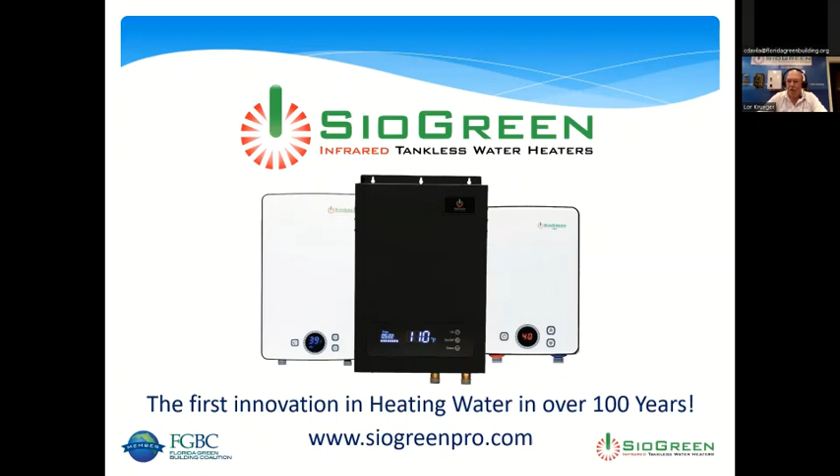You're good. Okay. SioGreen introduces the first innovation in heating water in over 100 years. But before we start, historically, electric tankless water heaters have earned a bad reputation. So try to forget about nearly everything you know about typical electric tankless water heaters.

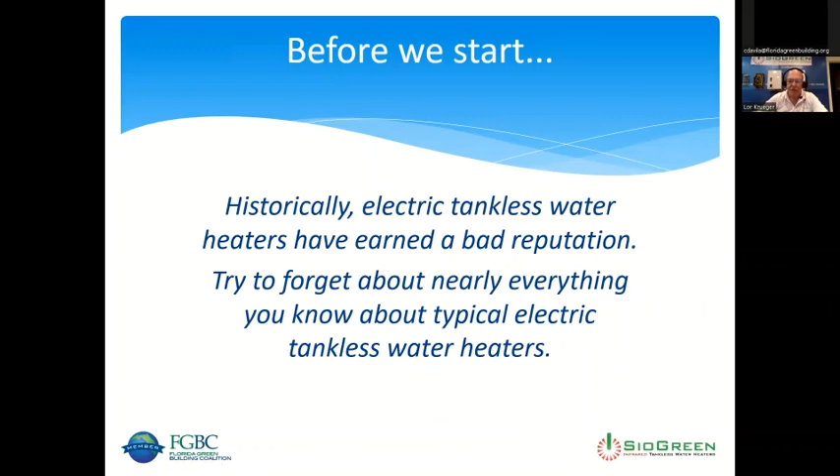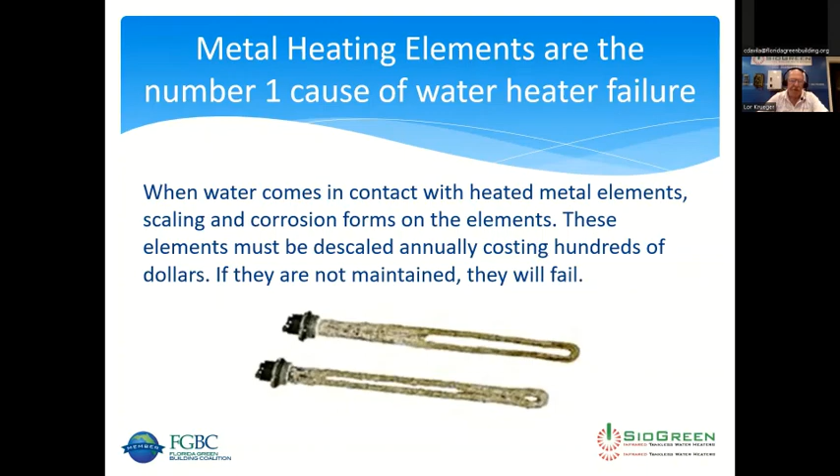Metal heating elements are the number one cause of water heater failure. When water comes in contact with heated metal elements, scaling and corrosion forms on the elements. These elements must be descaled annually, costing hundreds of dollars. If they're not maintained, they will fail.

If you neglect to clean the sediment from the bottom of your tank, bacteria can begin to develop. This bacteria can make you and your family sick when you use the water. Tanks should be flushed annually.

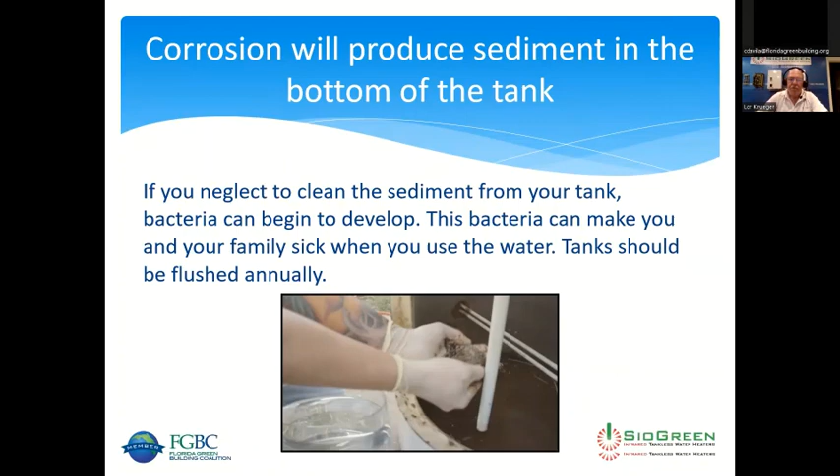So what's inside your water heater? If you don't have your water heater serviced every year, this is what's happening inside. When we asked homeowners when was the last time you had your water heater serviced, most people say never. And this is a very gruesome video of an actual water heater.

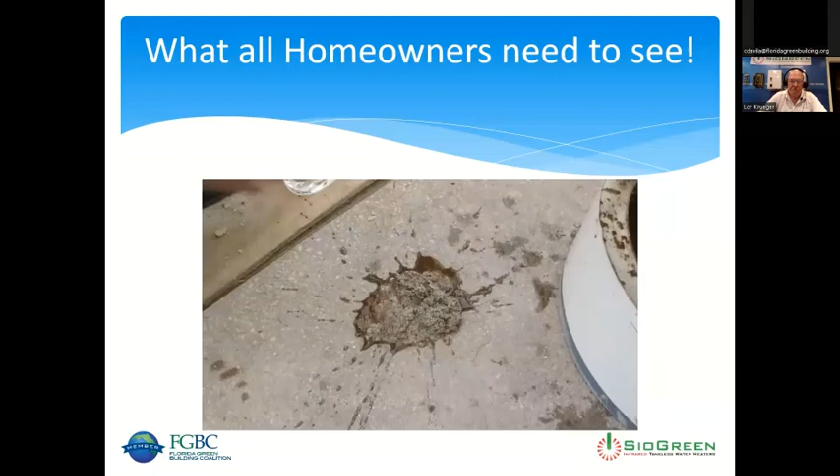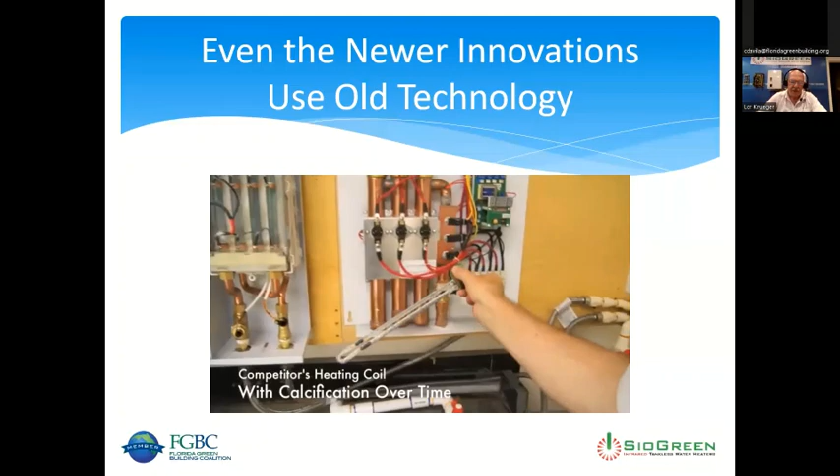So just keep in mind, people aren't even aware that this is happening inside their tank heaters. And if they see this video, that's a real game changer. Even in the new innovations with tankless water heaters, you still have issues with corrosion.

So one thing in common, it's the same old technology. It's been over 100 years and we're still heating water with some form of metal heating elements. And after 100 years, they still corrode.

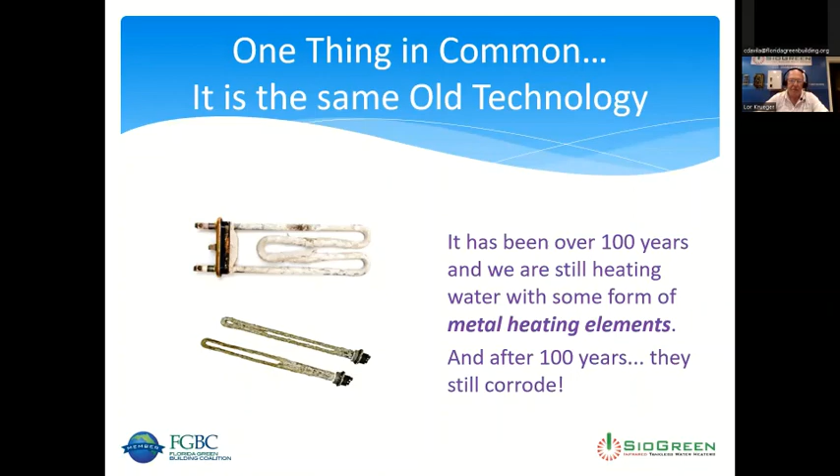There's a hidden cost to the mineral scale. Scaling acts as an insulator, causing the water heater to work harder and harder to heat the water. A scale buildup of only 1/16 of an inch can reduce the energy efficiency of the water heater by up to 50%. The water heater will eventually fail due to excessive heat caused by the insulative properties of scale, and can cut the useful life of the heater in half.

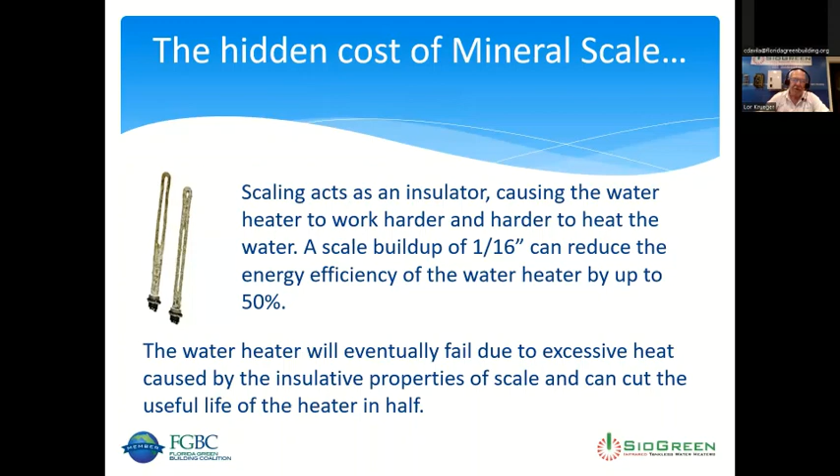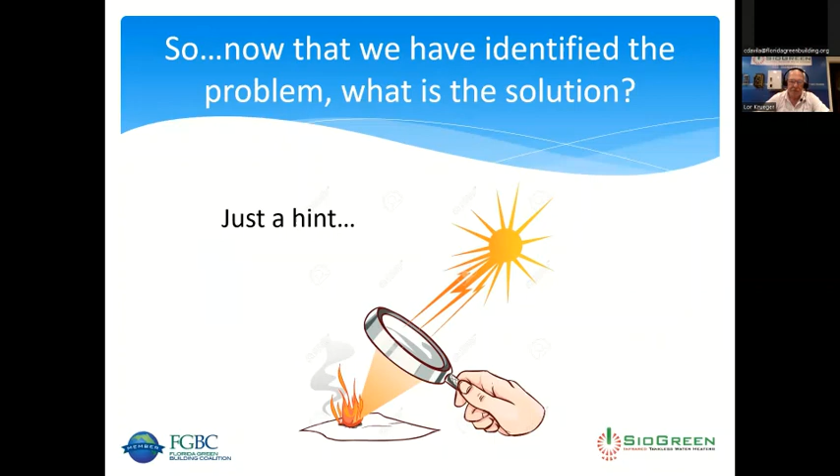So now that we've identified the problem, what's the solution? This is just a hint. We're going to introduce you to the SioGreen Quartz Infrared Electric Tankless Water Heaters.

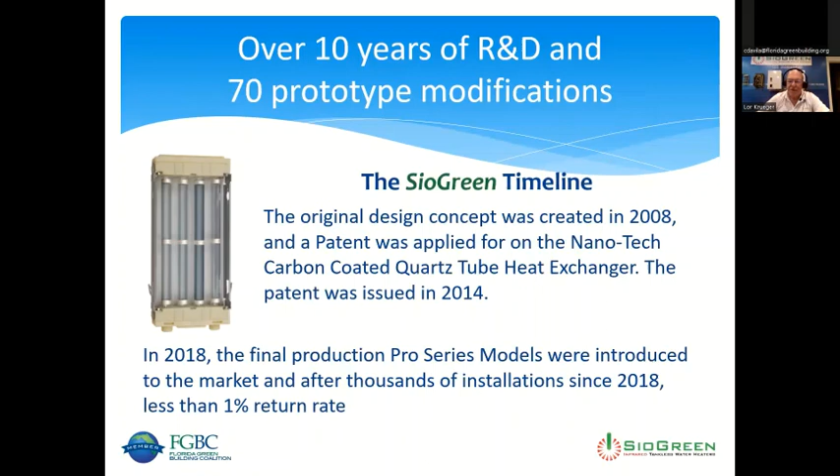A little bit of history. The original design concept was created in 2008, and a patent was applied for on the nanotech carbon-coated quartz tube heat exchanger, and the patent was issued in 2014. In 2018, the final production Pro Series models were introduced to the market, and after thousands of installations since 2018, we have less than 1% return rate.

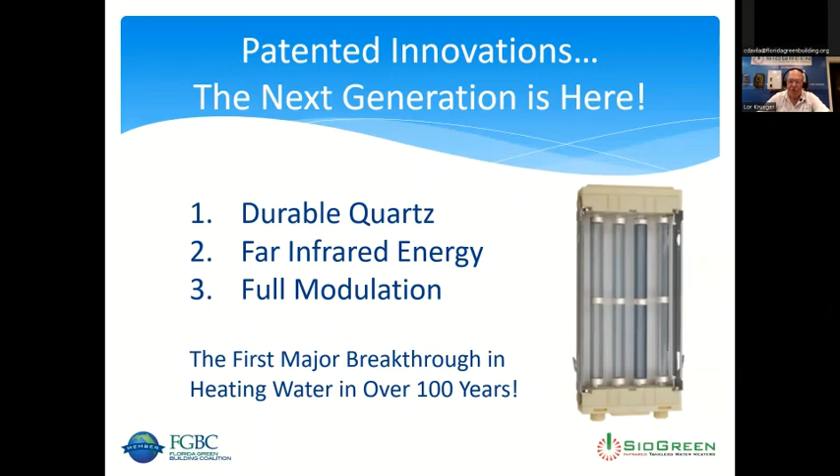These are the three patented innovations. This is what sets us apart from every other water heater on the market. We have durable quartz, far infrared energy, and full modulation. And this truly is the first major breakthrough in heating water in over 100 years.

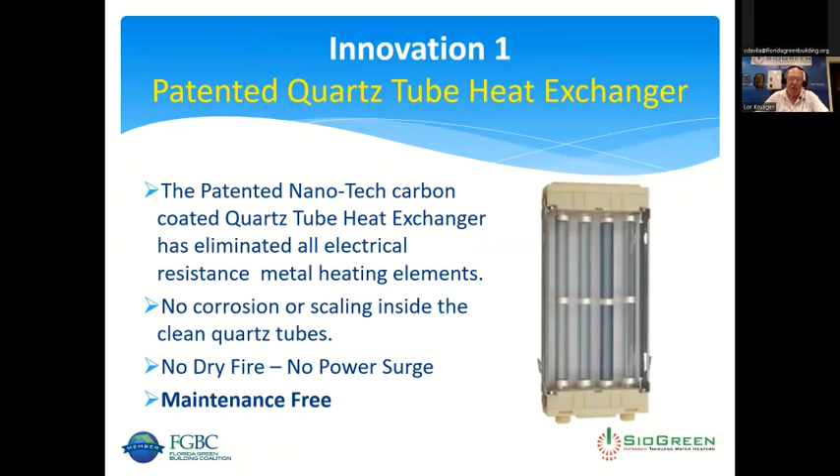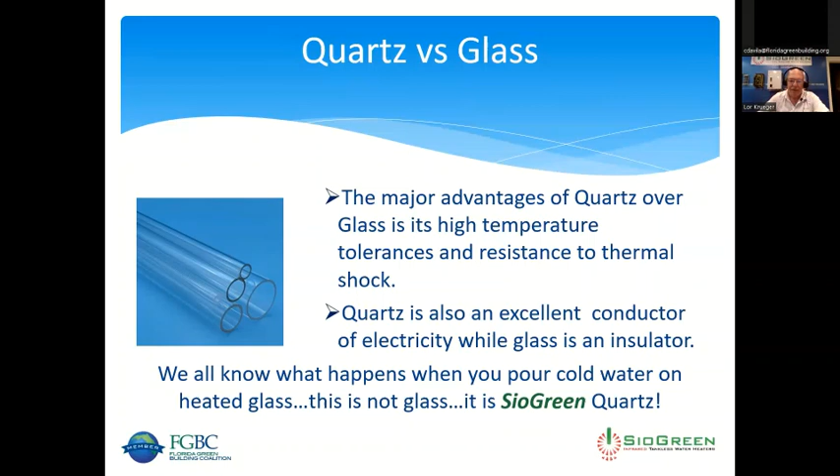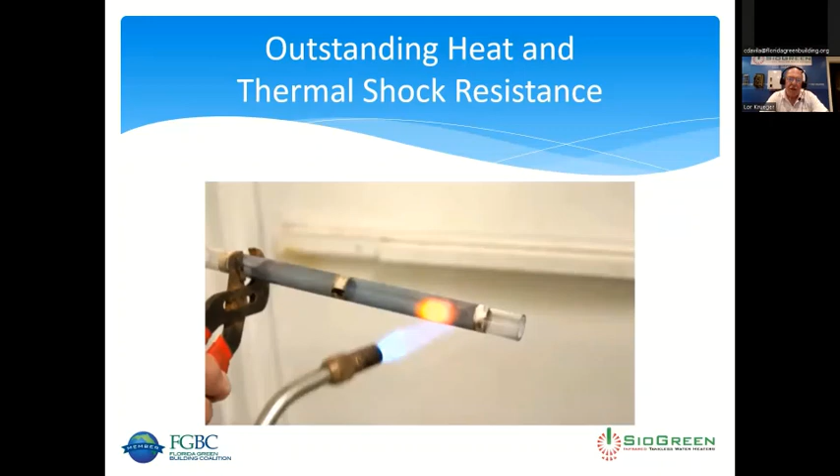About 8 years ago, I was at the SioGreen office before I started working with them, and we wondered what would happen if we put a torch on that tube. Had no idea. That's me holding it with the channel locks. That tube got cherry red hot, about 1300 degrees, and we poured cold water on it with absolutely no thermal shock. That was amazing.

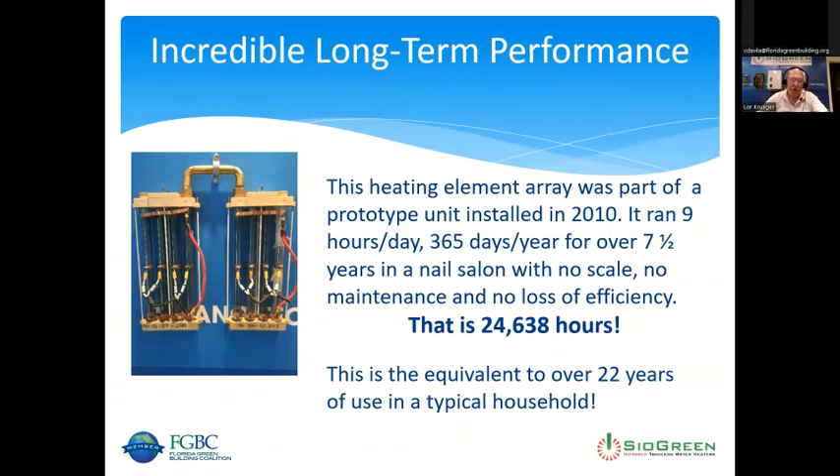Innovation 2, infrared energy, radiant heat. The sun heats the earth with radiant infrared energy. We heat large buildings with radiant infrared energy. And now we heat water with the same radiant infrared energy.

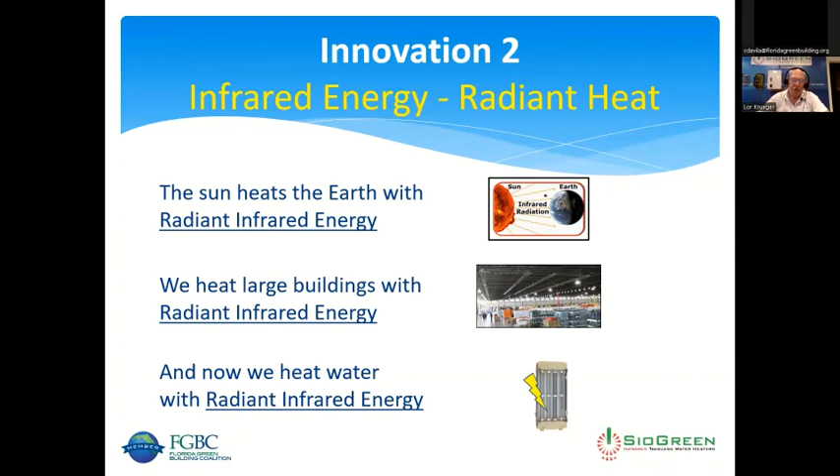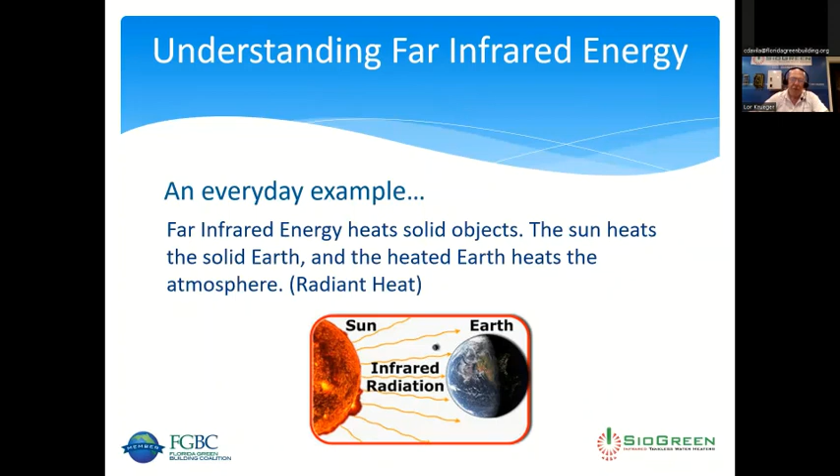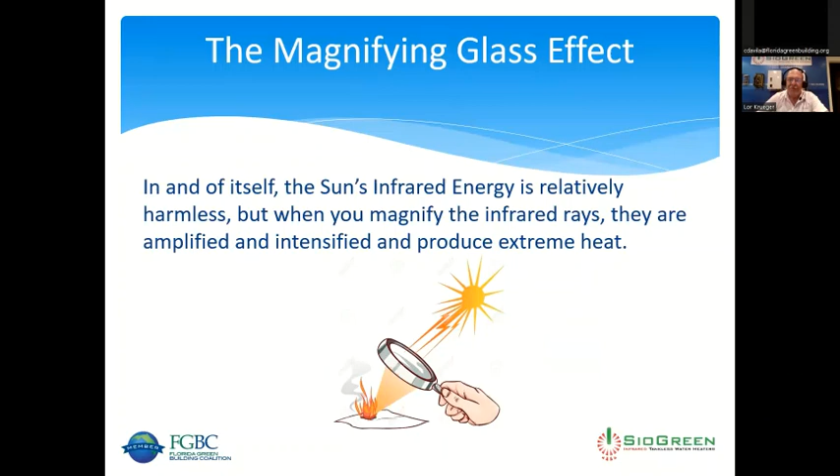Understanding far infrared is a very simple everyday example. When the sun heats the solid earth, the heated earth heats the atmosphere. That's radiant heat. In and of itself, the sun's infrared energy is relatively harmless. But when you magnify the infrared rays, they are amplified and intensified and produce extreme heat. That's as simple as we can make it.

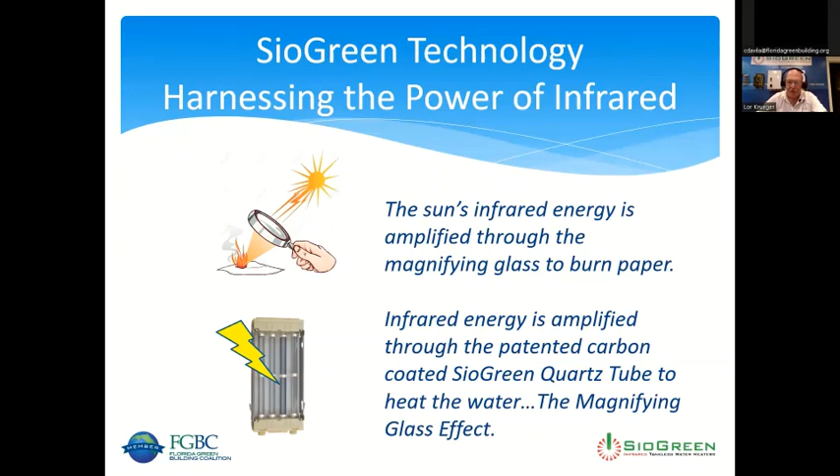The sun's infrared energy is amplified through a magnifying glass to burn paper. Infrared energy is amplified through the patented carbon-coated SioGreen quartz tube to heat the water. It's the magnifying glass effect.

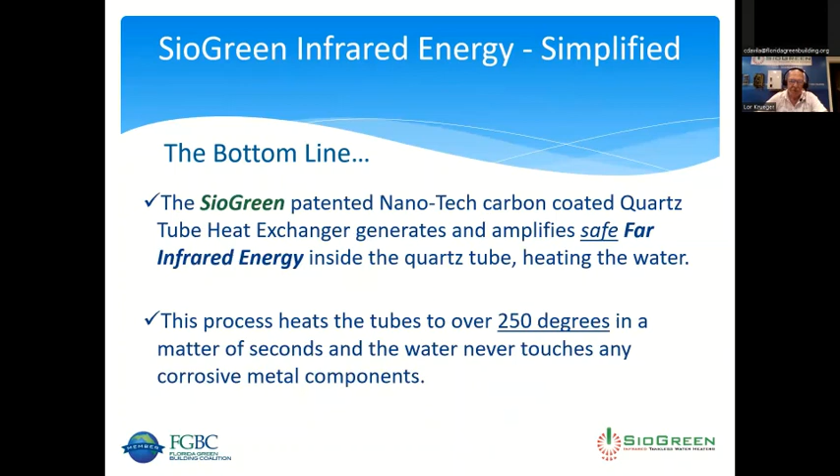So the bottom line: SioGreen's patented nanotech carbon-coated quartz tube heat exchanger generates and amplifies safe, far infrared energy inside the quartz tube, heating the water. This process will heat the tubes to over 250 degrees in a matter of seconds, and the water never touches any corrosive metal components. So why infrared energy?

This is going to get into the weeds a little bit, but SioGreen infrared technology uses amplified infrared radiant heat. But there's another major advantage to infrared: heating water at the molecular level. Water flows in clusters of 5 to 12 molecules. When the far infrared rays are applied to the clusters, the molecular structure of the water is altered due to resonance absorption. The water clusters are excited and broken down into individual molecules.

The infrared energy is then able to heat the molecules on an individual basis, ensuring the water is thoroughly heated at an accelerated rate. The water gets hotter faster and more thoroughly. This allows SioGreen tankless water heaters to operate much more efficiently.

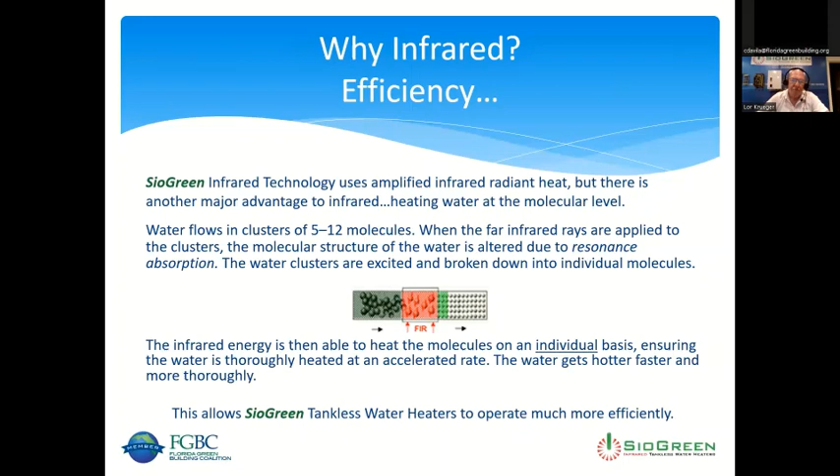Innovation 3, true modulation. There are a lot of competitive products on the market that claim to have modulation. Typically these are 2-tube, 3-tube tankless heaters, and their modulation basically is turning one of those tubes off and turning it back on.

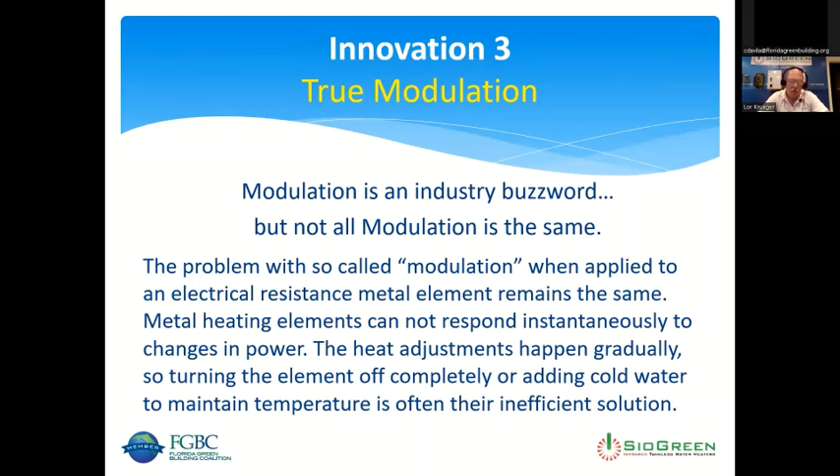The problem with so-called modulation, when applied to an electrical resistance metal element, remains the same. Metal heating elements cannot respond instantaneously to changes in power. The heat adjustments happen gradually, so turning the element off completely or adding cold water to maintain the temperature is often their inefficient solution.

SioGreen uses an intelligent computerized internal controller. Each quartz tube has 2 sections. We monitor each section of each tube and adjust the amount of power required to reach and maintain the exit temperature setting.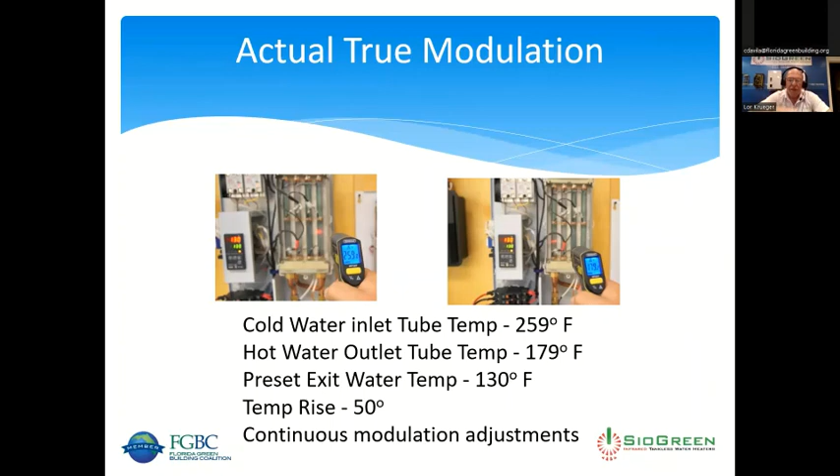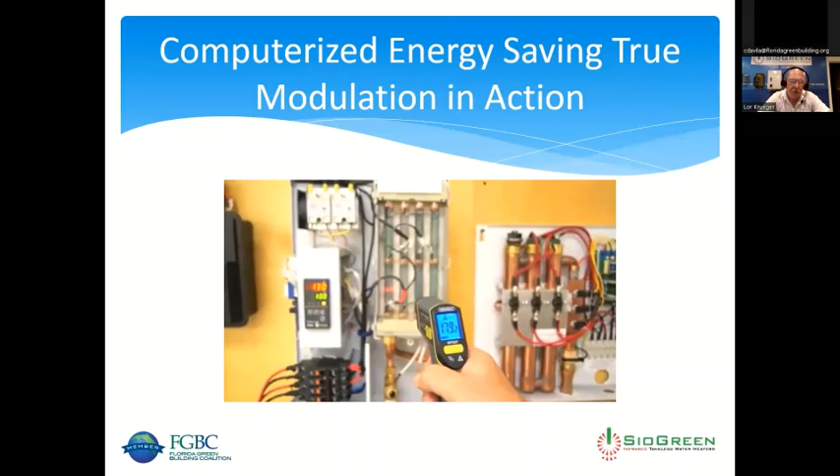You'll be able to see how we continuously adjust the temperatures. If you pay attention to the heat meter, it's going to raise up to about 260 degrees. The exit temp is set at 130, the top number, and the actual temperature is the bottom number, and it never fluctuates. As we move to the exit hot water tube, we're down to about 179 degrees, and you can see how it's modulating and changing every second or two.

Green building friendly. According to the World Green Building Council, green buildings preserve precious natural resources and improve our quality of life. Included in the overall objectives of green building is efficient use of energy, water, and other resources.

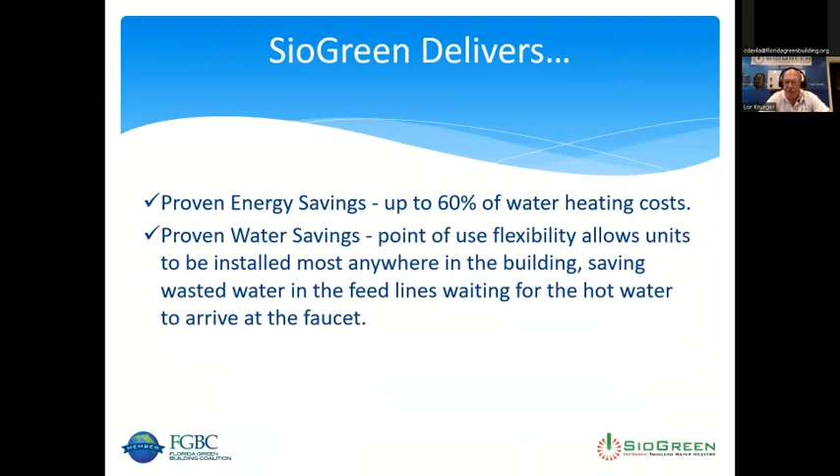SioGreen delivers on all 3 counts. We have proven energy savings up to 60% of water heating costs when compared to a tank heater. We have proven water savings.

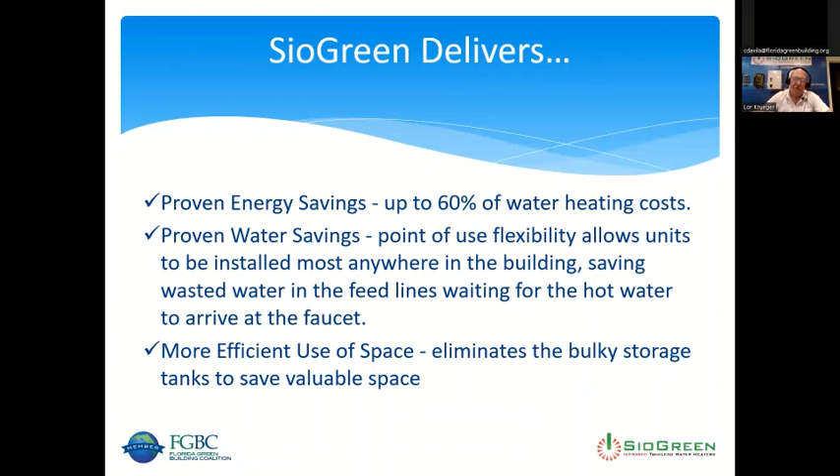These units can be installed anywhere in the building. There's no venting, and it does not have to be permanently fixed in a location, such as a tank. Point of use flexibility allows the units to be installed almost anywhere in the building, saving wasted water in the feed lines, waiting for the hot water to arrive at the faucet. And there's obviously much more efficient use of space. It eliminates the bulky storage tanks to save that space.

So what does this mean to you? Number 1, energy cost savings. Number 2, maintenance cost savings. And number 3, space savings.

Here's an example how we can make the claim of 60% savings on heating water. We're going to compare a 50-gallon storage tank heater to our Sio 18 Pro Flex. Based on a 15-minute shower, using 22.5 gallons of water with a 1.5 GPM low flow head, the standard 50-gallon tank takes 34 minutes to recover, to reheat the water inside the tank.

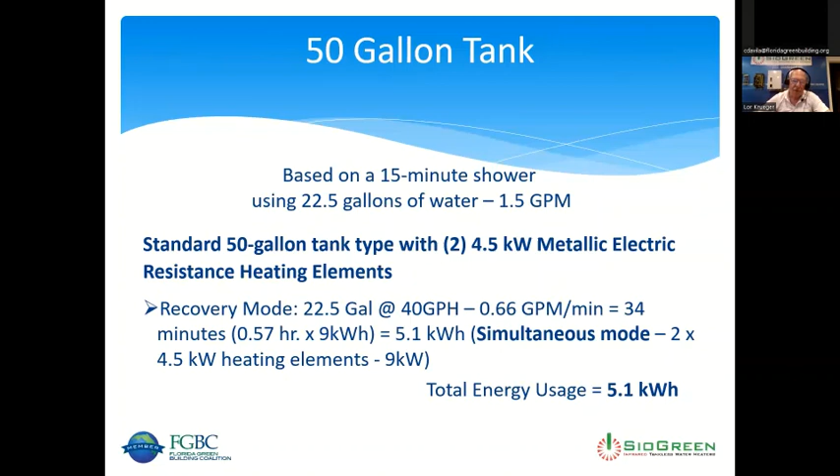At 5.1 kilowatts in the simultaneous mode, you're going to be using total energy usage of 5.1 kilowatts on that 15-minute shower.

SioGreen Pro, based on the same 15-minute shower, the actual runtime and the 17.6 kilowatts, it's rated at 18, but it's actually about 17.6. At a 60-degree rise, we run for a quarter of an hour, 15 minutes. The actual metered usage with modulation, we're really only using about 8K. So based on a quarter of an hour, that's 2 kilowatts for that same shower.

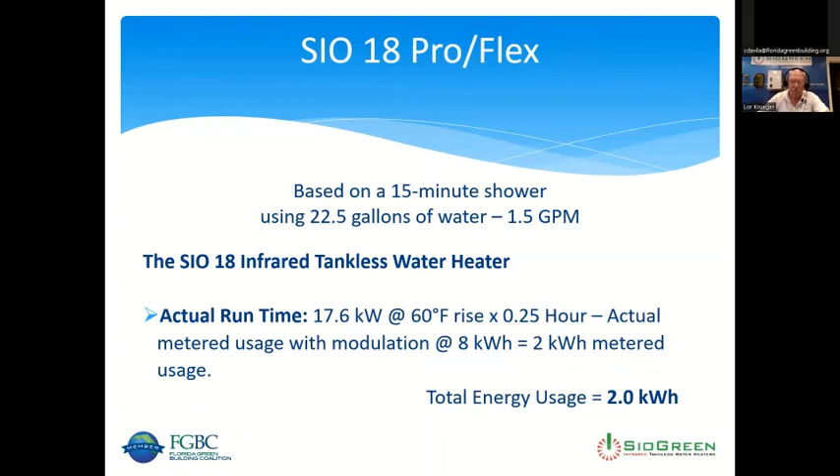Side by side, the typical tank heater costs 69 cents per shower. The SioGreen, 27 cents per shower, and that's 42 cents, or 60% savings, on every shower.

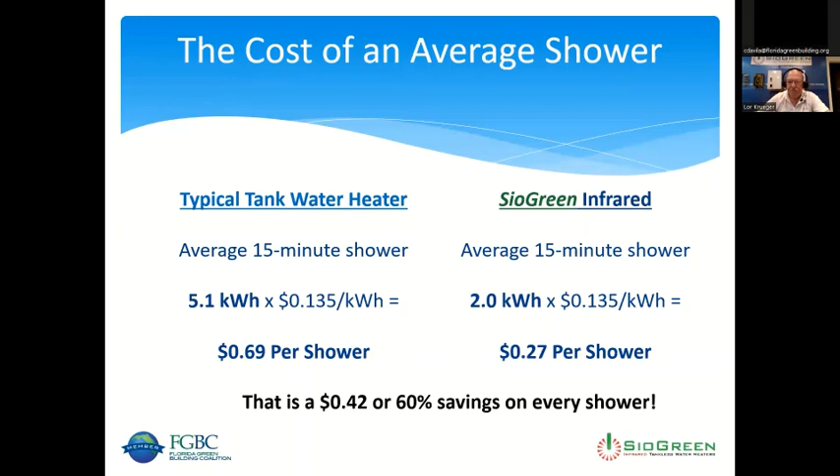Flexible installations, point of use options. SioGreen water heaters do not require venting and can be installed anywhere in the building. This results in the following savings.

You save water. Eliminate the waste of cold water in the feed line waiting for hot water to arrive on long remote runs. Saves plumbing material. You only have to run a single cold water pipe to the heater, eliminating the second hot water pipe and all the fittings. Save energy. Eliminating the long wait for hot water, the heater runs much less by delivering the hot water much sooner.

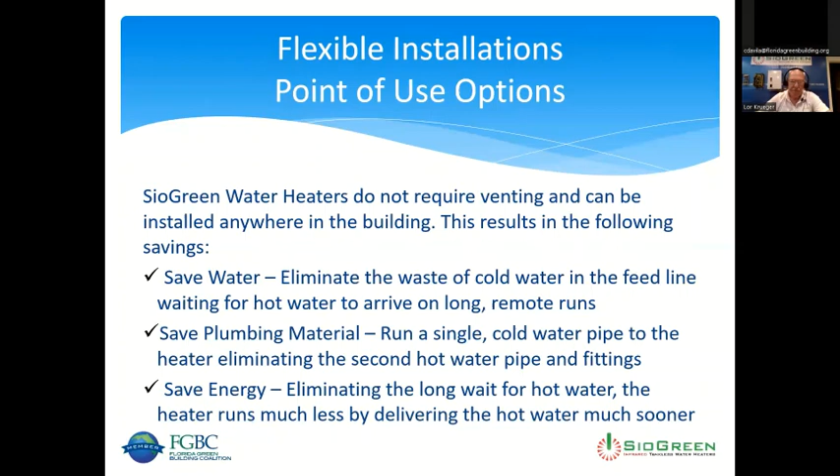This is an example of our energy savings. We're going to show you a meter showing the amperage and the kilowatts. This is the Sio 18 Pro. It's rated at 18K and 80 amps.

Even at full flow with a 45-degree rise, the Sio 18 does not draw more than 12 kilowatts and 50 amps. That's a substantial reduction from its capacity. There is no power surge on startup, and the Sio 18 reaches 54 amps before leveling off under 50.

So we're going to show you the video. It's going to show you the preset temp, and the actual water temp, which doesn't fluctuate by more than 1 degree. Then we're going to look at the amps and the kilowatts. Then we're going to shut the unit down and restart it to show you there's no power surge.

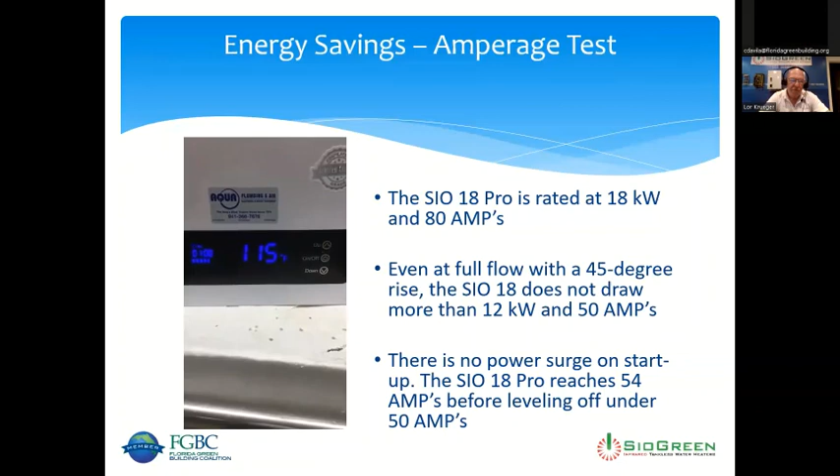It's set at 115. Our actual temperature, 114.2. And this is the amps and kilowatts. Kilowatts on top, amps on the bottom. 11.2 kilowatts and 47 amps. Now we shut it down, and now we turn it back up. It peaked out at 54 amps compared to 80, which is rated for.

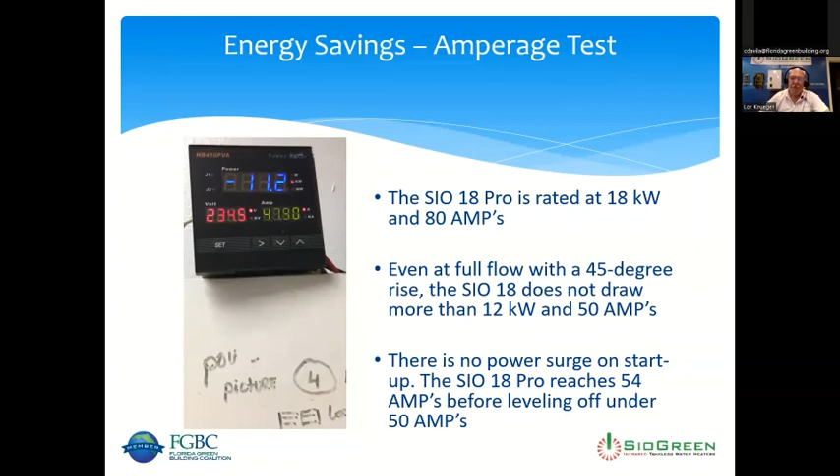Maintenance cost savings. There's no corrosion, no maintenance. Electric tank and tankless heaters should be flushed and descaled annually, costing hundreds of dollars each year. SioGreen units will pay for themselves in just a few years on maintenance costs alone.

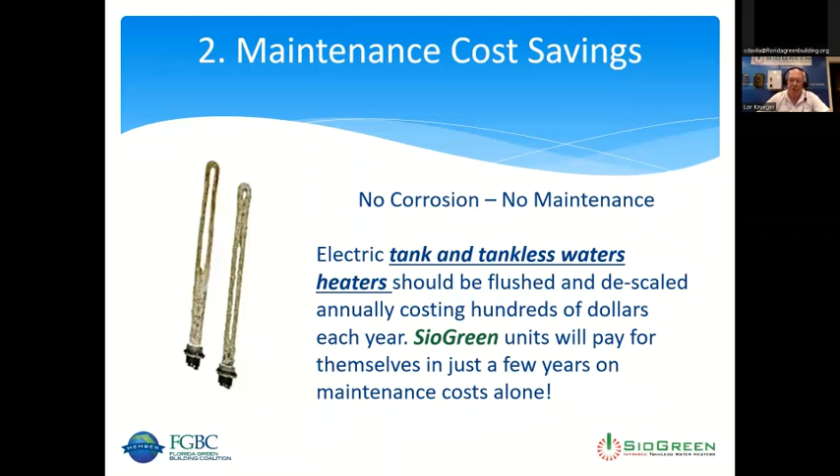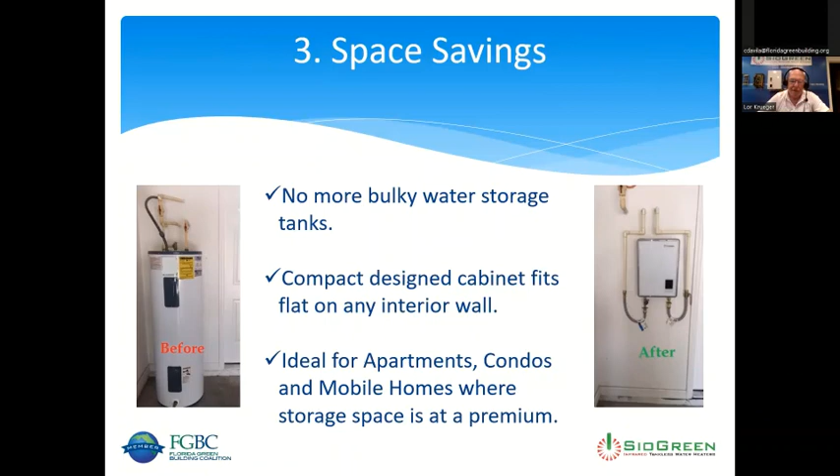And of course, no more bulky water storage tanks. Compact designed cabinet fits flat on any interior wall. It's ideal for apartments, condos, mobile homes, where storage space is at a premium.

We're tested and certified. SioGreen Quartz infrared electric tankless water heaters have been tested and certified by some of the leading testing facilities in the world and are in compliance with all U.S. and local building codes. We're certified by Department of Energy Title 10. It conforms to NSF 372, the lead content reduction class, complies with UL 499, and we're listed with the California Energy Commission. If anybody knows anything about California, that is not an easy task. Those people are out of their minds, but we qualified and we are listed.

We have basically 3 point of use models. The IR30 is a 3.4 kilowatt, 120 volt single sink application, hand wash only. The IR260 is the same dimensional size as the IR30, but it's 220 volt, 6K single sink application, and you can run an outdoor shower or outdoor kitchen, but it's designed to be a single sink. Then we have the IR288, an 8.8 kilowatt for a single bath. I have a 2-bedroom single bath house. I run the 288 at my house. I can run the shower and a faucet at the same time with no issues. It's ideal for apartment and mobile home applications.

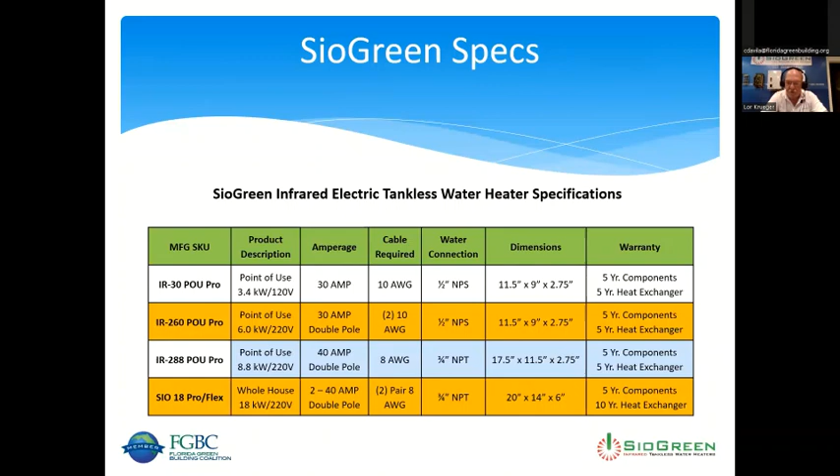Now, here are the specs. The IR30: 30 amps, 10 gauge wire. We can get into the warranty a little bit later. The IR260: 30 amp double pole breaker, running 2 hot leads, 10 gauge wire. The IR288: 40 amp double pole, 8 gauge wire. The SIO 18 Pro Flex: 2 40 amp double pole breakers and 2 pair of 8 gauge wire, running 4 hot leads to the unit itself.

Flow rates. I have an issue with flow rates. Everybody talks about flow rates. I'll give you one quick anecdotal story. I had a customer down in Miami. He said, we're getting beat up on these flow rates. And I gave him a couple of classic examples.

I asked one of the guys, Tim, what was the water temperature coming into your house yesterday afternoon at 2:30? He said, well, I guess it was around... no, exactly, what was the temperature? Well, I don't know. Eileen, what was the water pressure coming into your house yesterday morning at 8 a.m.? She said, I have no idea. What is the basis of these flow rate tests? It never gives you the water temp. Very seldom does it give you the water temperature. You have no idea what the plumbing size is. So you have to take the flow rates with a grain of salt.

Now, our flow rates are tested inside our own lab, and we have all the stats on that. Some claim to give you 5.5 gallons per minute with a 27 kilowatt unit, and it said up to 5 baths not running simultaneously. Well, what does that mean? You might as well say you can do 20 bathrooms as long as you're not running them all at the same time. Flow rates are basic marketing.

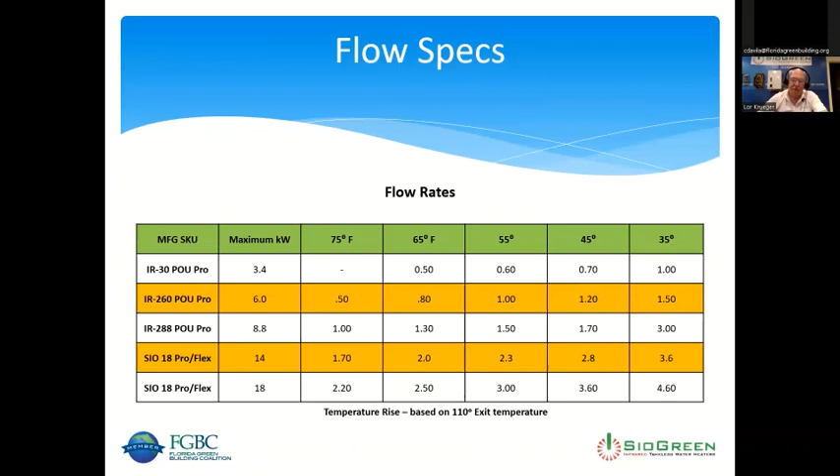Our warranties are pretty unique. Our warranty is a full unit replacement warranty. If the unit fails while under warranty, SioGreen will replace the entire unit according to the terms of the written warranty. Warranties are valid only if the unit was installed by a licensed contractor according to published installation instructions.

You cannot buy these in the big box store. You cannot buy these online. They're sold only through licensed contractors and plumbers.

The Pro Series, the point of use, 2-year full replacement, 5 years on the electronics and heat exchanger. The SIO series is the same 2-year full replacement, 5-year electronics, and 10 years on the heat exchanger.

Our design is very simple. If you open the case, it's very well laid out. There's 5 basic components, they're all plug and play. You've got 2 sets of plumbing, the heat exchanger, the PC board, and the breakers.

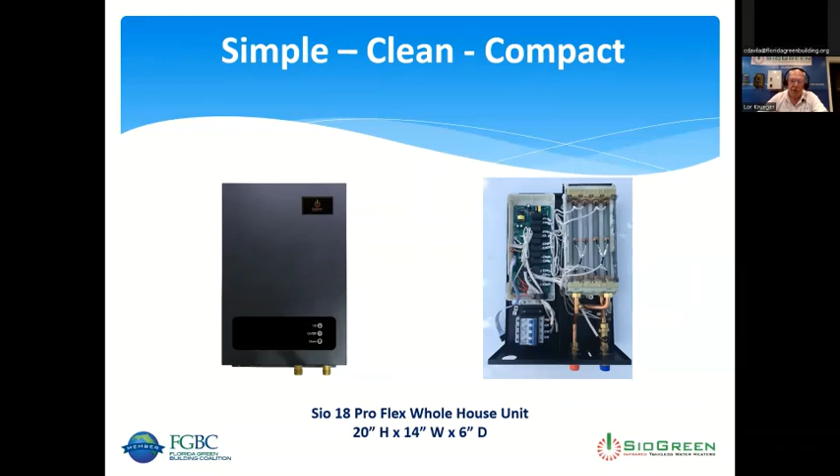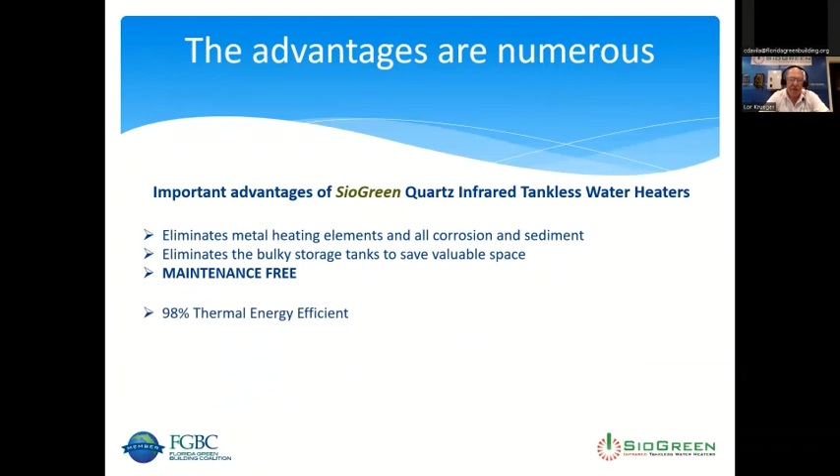So these are the advantages: we eliminate the metal heating elements and all the corrosion, eliminate the bulky storage tanks, we're maintenance free, 98% thermal energy efficient, power surge protected with internal circuit breakers, backflow prevention standard, no dry fire, endless supply of hot water, never run out due to tank limitations, no wasted energy keeping water hot in a tank when not in use, lower operating costs. The units only run when you use hot water, and they'll last up to 4 times longer than traditional water heaters.

Now, the power surge protection with our internal circuit breakers - in St. Pete we get a lot of electrical storms. We had an apartment complex that was replacing all of their previous electric tankless water heaters. Every time there was a severe thunderstorm or lightning storm, they'd get a power surge, and it would literally melt the terminal blocks inside these units, costing $300 to replace those or replace the unit.

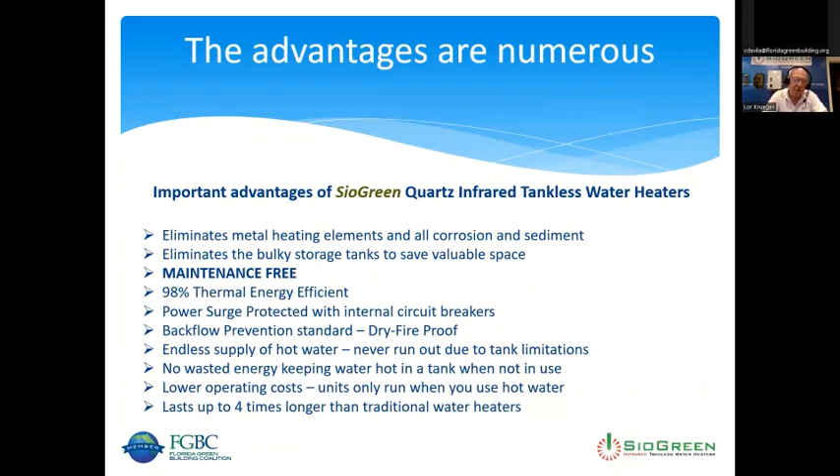We started installing our SIO units with the internal breakers, and every time there was a subsequent storm, those other units would still burn out, but ours would just trip the breakers. Open the cover, flip the breakers back on, and you're good to go. And Florida has a lot of lightning strikes.

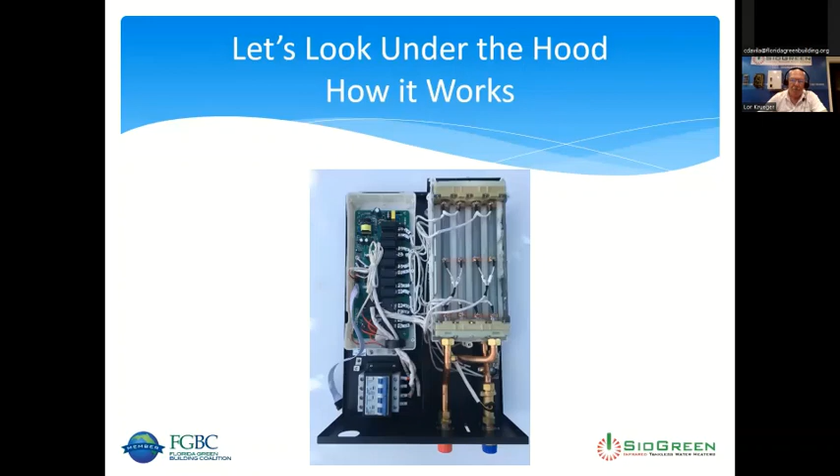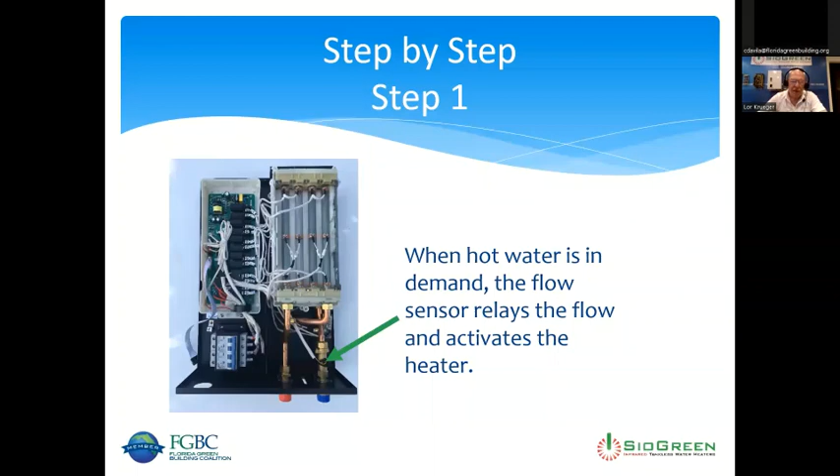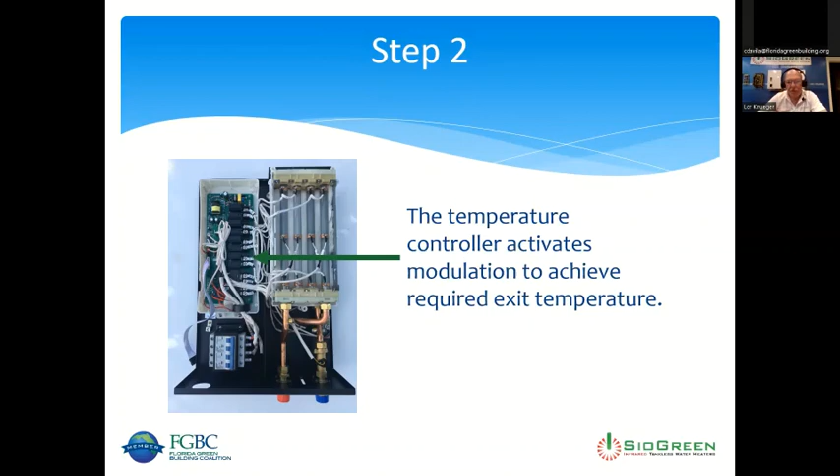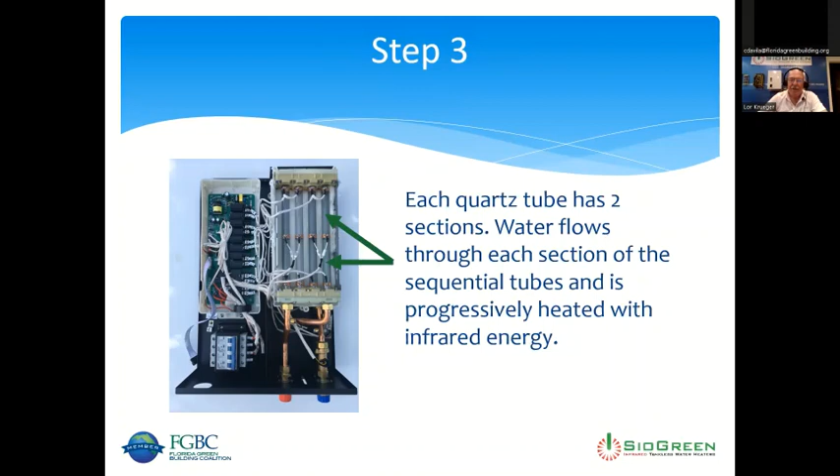Each tube has two sections. Water flows through each section of sequential tubes and is progressively heated with infrared energy. The exit temperature sensor measures and adjusts the flow to maintain a constant exit temperature.

We're more concerned about the temperature of the water versus the flow rate. It'll only fluctuate by a couple tenths of a gallon, but it's important to maintain the temperature. So that is automatically adjusted to maintain the exit temp.

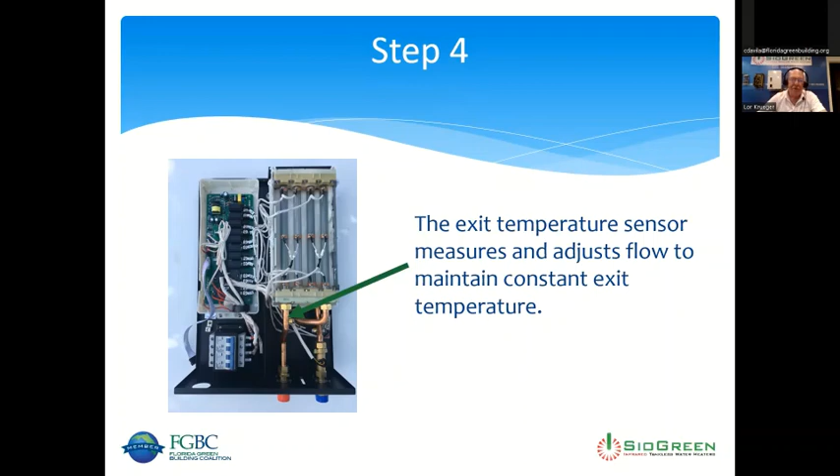Multiple relays in the intelligent computerized internal control monitor each section of each tube and apply the minimum amount of power necessary to achieve and maintain the preset exit temperature. Now, as I alluded to earlier, the other manufacturers with 2, 3, or 4 actual tubes with metal heating elements inside can only monitor 2, 3, or 4 regions or areas of the heater.

We've got 2 banks of 4 tubes each, 2 sections to each tube, which means we're monitoring 16 different zones in that heat exchanger to optimize the minimal amount of energy use. It's a far different scenario than with just 2 or 3.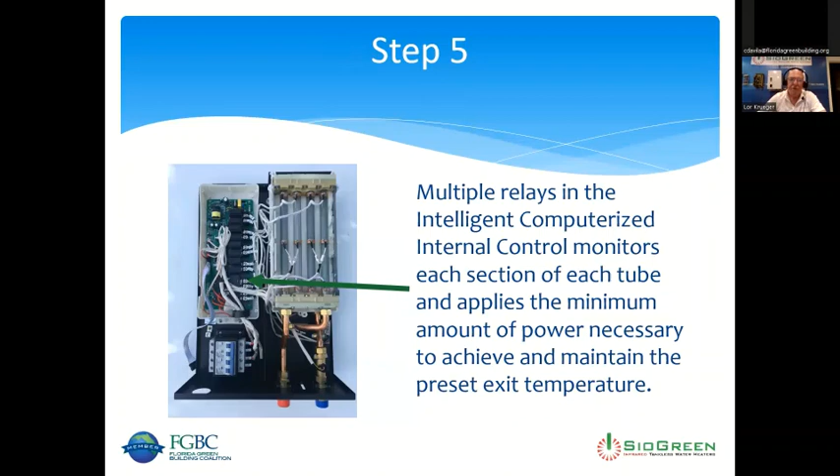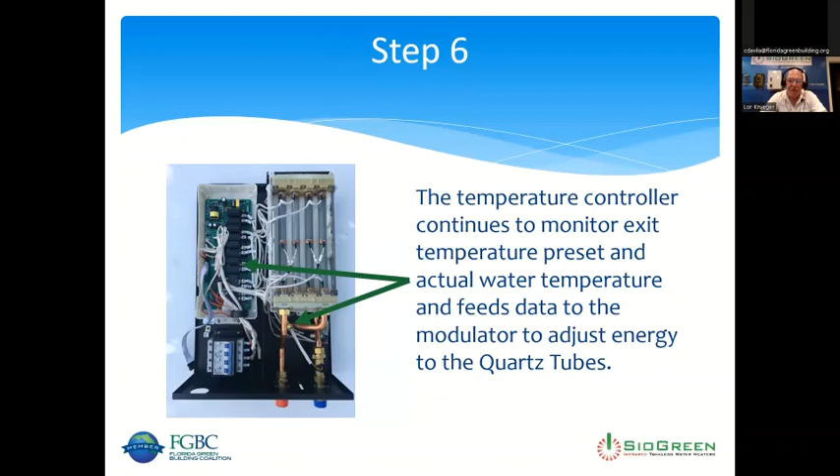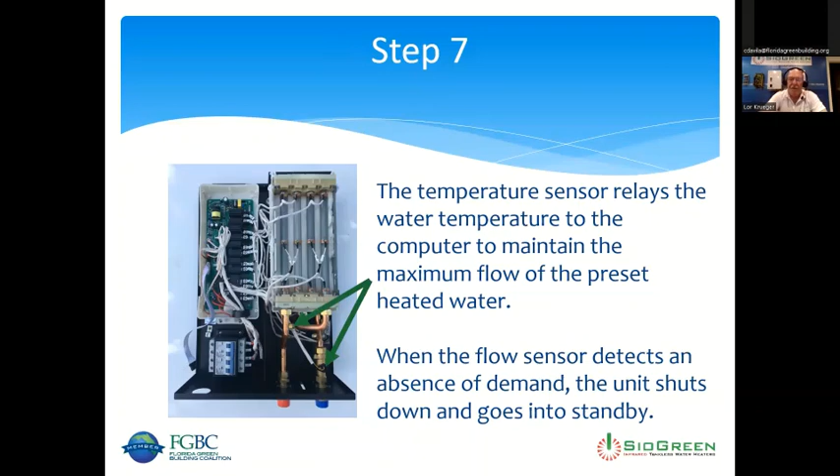The temperature controller continues to monitor exit temperature preset and actual water temperature and feeds the data to the modulator to adjust the quartz tubes. And finally, the temperature sensor relays the water temp to the computer to maintain the maximum flow of the preset heated water. When the flow sensor detects an absence of demand, the unit shuts down and goes into standby.